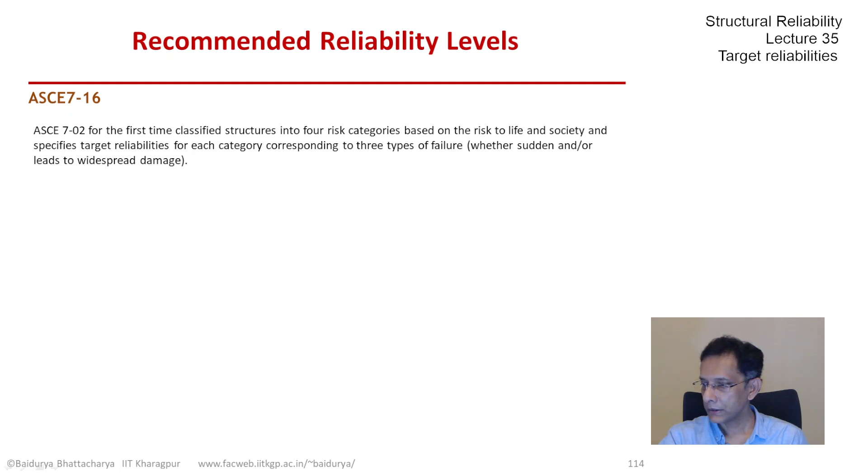Let's first take a look at the 4 risk categories. Risk category 1 is those structures that represent low risk to human life in the event of failure. Then let's define risk category 4. These are on the other end of the spectrum, structures that are essential facilities whose failure could pose a substantial hazard to the community, many lives at risk, including those structures that store hazardous and toxic materials, and also those structures which have an essential role in supporting other category 4 structures.

Then let's define category 3. It's those structures that pose a substantial risk to human life, and structures that are similar to category 4 in terms of hazards and toxic substances. And then category 2 are those that are not in 1 or 3 or 4.

Now it would obviously be an interesting and logical question to see how these 4 risk categories compare to the EN 1990 Eurocodes consequence classes. So it would seem, based on the definitions, that ASCE's risk categories 1 and 2 would very closely match CC1 of the Eurocodes. It would seem that CC2 would not only cover risk category 3 completely, but a part of risk category 4, and there would likewise be an overlap for CC3, which would cover all of category 4 and parts of category 3.

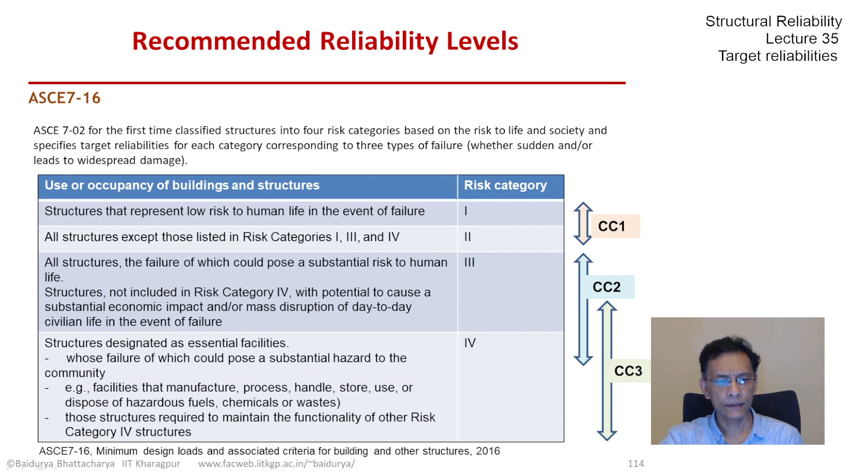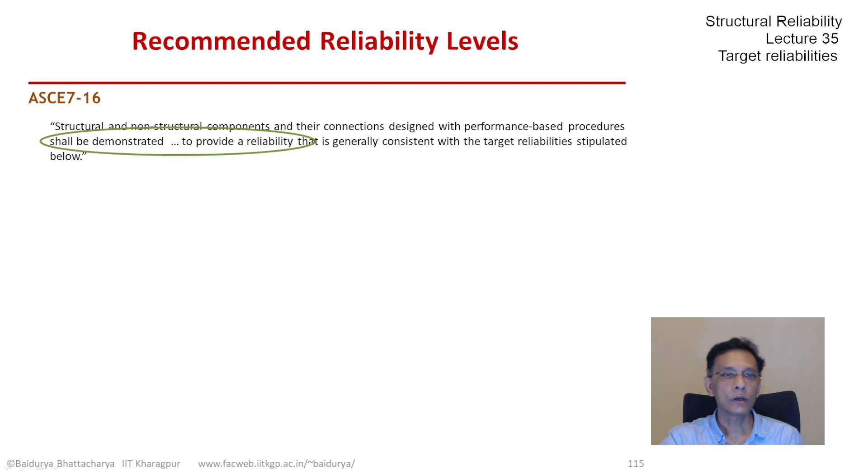Now let us look at what the proposed target reliabilities are. ASCE 7 of 2016 is very explicit that these structures have to demonstrate that the specified reliabilities have been achieved. And so there are 3 types of failure. The first one is failure that is not sudden and does not lead to widespread progression of damage, and for that we have target beta values per year gently rising from 3.7 all the way to 4.4.

Then we come to the next one, failure that is either sudden or leads to widespread progression of damage, but not both. So basically we are partitioning the entire sample space into A and B, either A or B but not both, and neither A nor B. So this is the second class, either sudden or leads to widespread progression of damage, and you see the beta values are slightly higher than the row above in each column. So they rise from 4.0 all the way to 4.8.

And then finally we have the AND operator: failure that is sudden and results in widespread progression of damage has the highest target reliabilities, so they increase from 4.4 all the way to 5.2 for risk category 4. So 5.2 is the most severe case and has the highest target reliability.

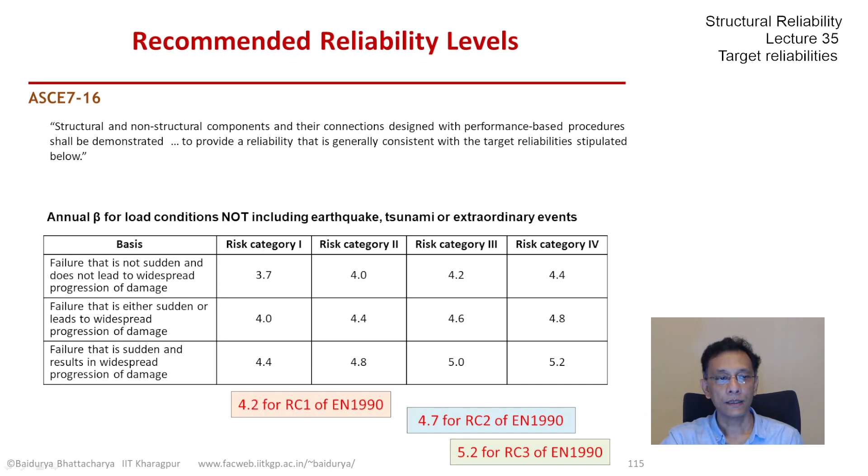And then if we look at RC2, which is 4.7, and compare with risk category 3 and part of risk category 4, it would seem that EN 1990 is quite in the middle of the range of ASCE 7. And finally, if we look at RC3, which is 5.2, that is obviously at the extreme upper end of the range for ASCE 7. So it would appear that Eurocodes provide the highest level of target reliability for those with the highest risk, and in this case failure is sudden, so not much warning, and widespread damage.

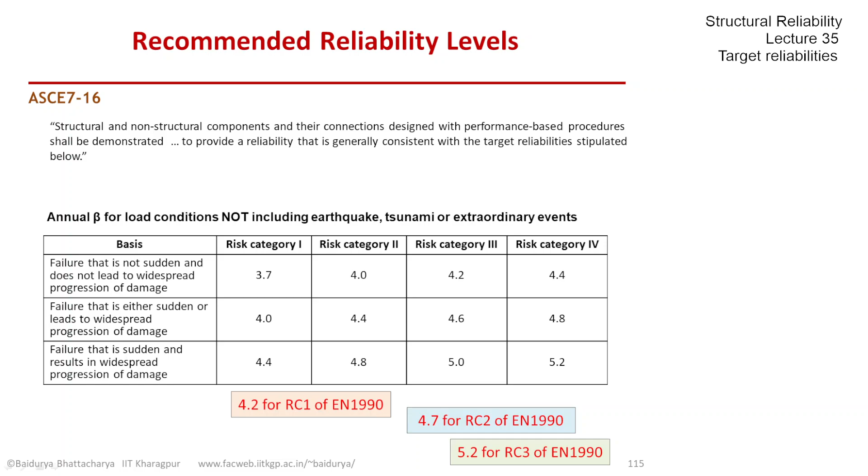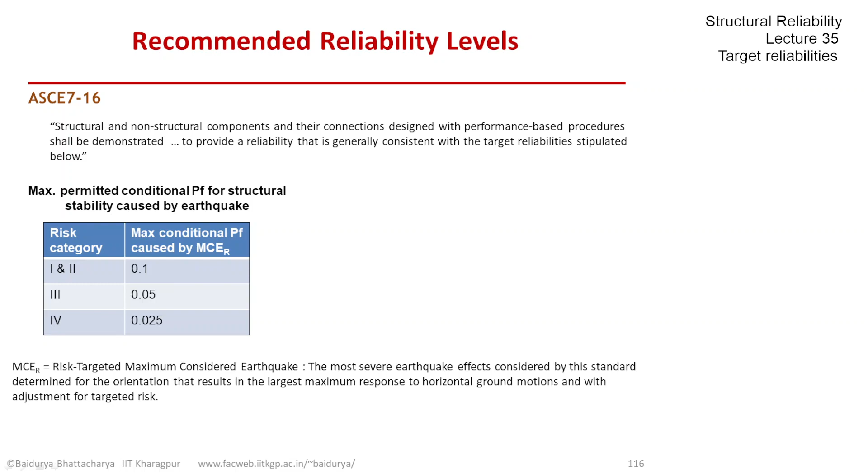So these target reliabilities were for load conditions that did not include earthquake, tsunami, or extraordinary events. ASCE 7 also provides target reliabilities for those situations. So here are two of those. Under risk categories 1 and 2, or 3, or 4, there are maximum permitted conditional probabilities of failure, so they are not with respect to any time horizon, but against loss of stability under earthquake, especially the MCER, the maximum considered earthquake, which is risk targeted. And likewise, we also find the maximum permitted conditional PF for ordinary non-critical structural members, also under MCER.

Now let's just take a look at an example. Suppose we are looking at risk category 3, which is very common for most structures, and we see that the conditional failure probability is 5%. So if we say that the probability of an MCER in 50 years, which is say the lifetime, is 2%, then the unconditional PF, the unconditional failure probability, will be 0.05 times 0.02, which is 0.001.